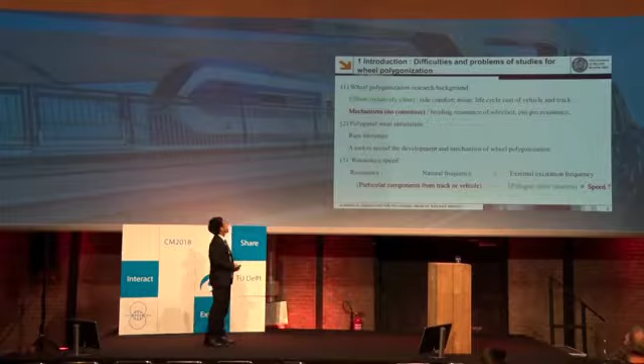In the first part, I will introduce my reflection about the difficulties and problems in studies of wheel polygonization. It has been studied for over 30 years. The effects are relatively clear, but the mechanisms are still unknown. Some research shows the mechanism is concerned with bending resonance of the wheelset, pin-pin resonance, and other possible reasons. But by far, there's no consensus.

From my viewpoint, one of the difficulties in studying this problem is that it is not easy to simulate the polygonal wear process. But once we achieve this, we can figure out each step from the initial out-of-round profile to the final worn, possibly high-order profile. This is a very important tool to reveal the mechanism of wheel polygonization.

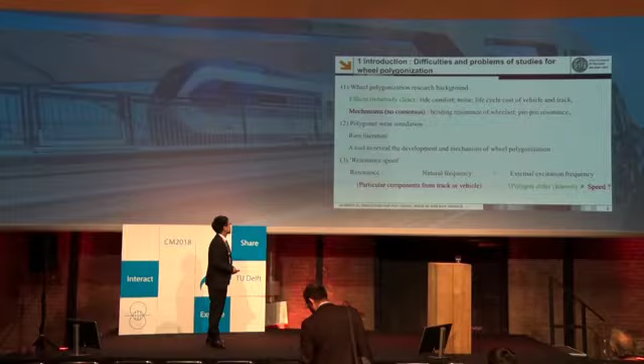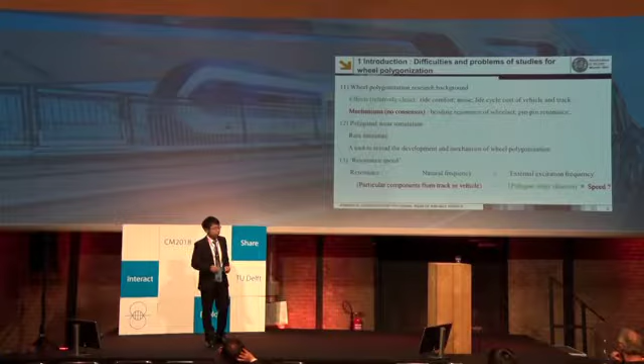Another problem I want to mention is about resonance speed. Usually the generic logic to study wheel polygonization is to find a resonance frequency from the vehicle system or track system that equals the outside excitation frequency caused by polygonal wear at a specific speed. But the problem is, which speed should we use, the maximum speed or the average speed? This could be more difficult to answer for a metro vehicle, because it changes speed for more than half of the running time. In my research, we give some ideas to these problems.

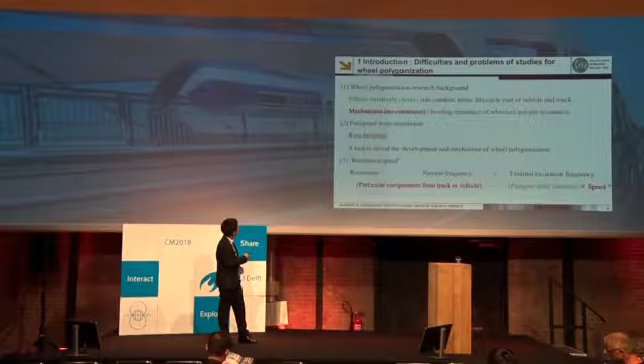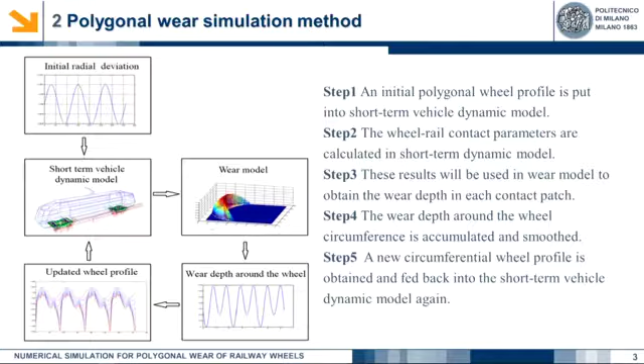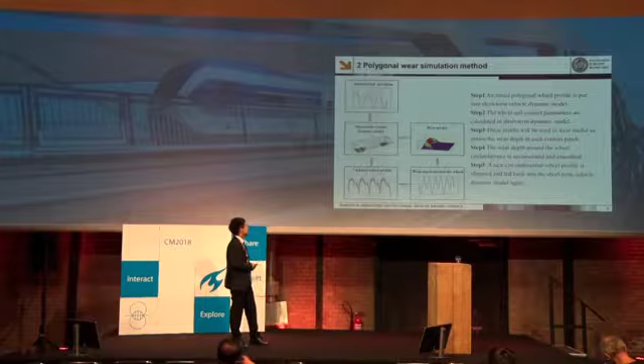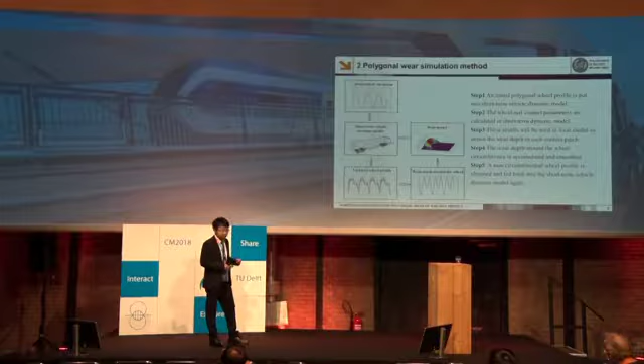Now let's come to the second part, the simulation method for polygonal wear. Here is a schematic flowchart of this method. First, an initial polygonal wheel profile is put into a short-term dynamic model, and some wheel-rail contact parameters like normal force and contact positions are obtained. This data is used to calculate the wear depth for each contact patch using wear models. Then the wear depth around the wheel circumference is accumulated and filtered, and based on this we get a new circumferential wheel profile, which is sent back into the short-term dynamic model. After iteration, we can finally get the development process of the polygonal wear.

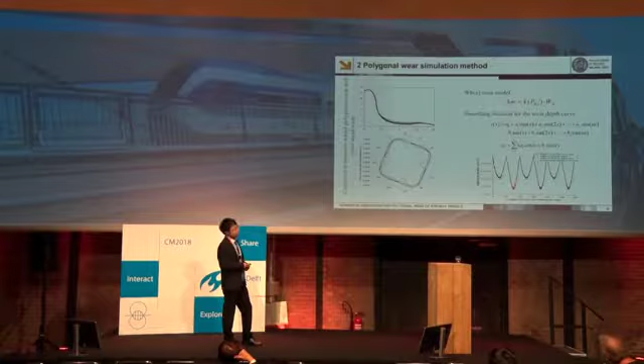Here I present some detailed problems inside this simulation method. The wear model I use is based on wear friction power, which assumes that the removed material is proportional to the wear friction power.

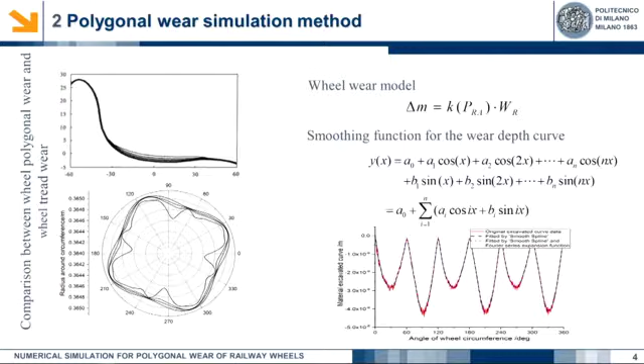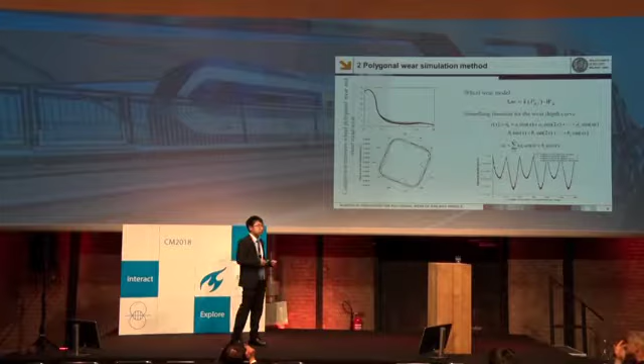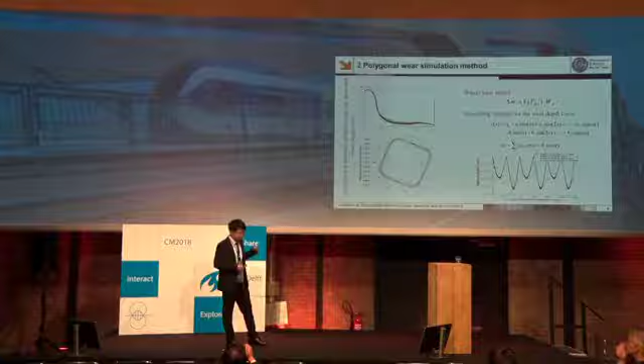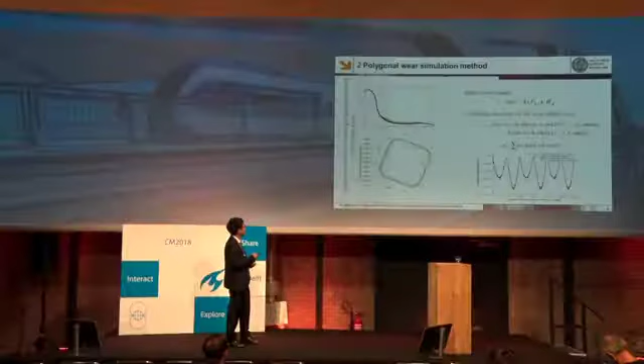There is a new challenging issue when you simulate polygonal wear. The wheel circumference profile is a closed line compared with the wheel tread, meaning the point at 0 degrees and the point at 360 degrees are connected to each other. So some conventional curve fitting methods cannot be used because they cannot ensure the connecting point is continuous and differentiable. Simulation results show that even a small disturbance at the connecting points brings about a huge impact. So to solve this problem, we propose using a Fourier series expansion function to fit and smooth the curves. You can find more detailed explanation in my paper.

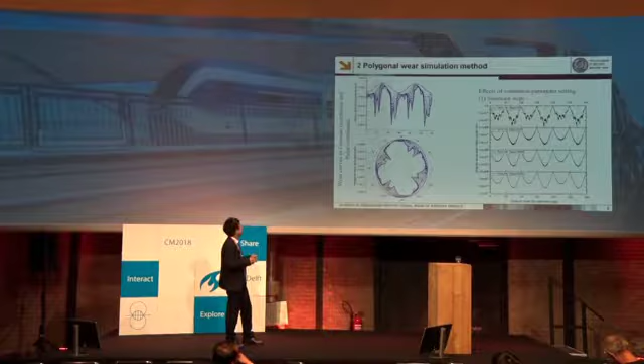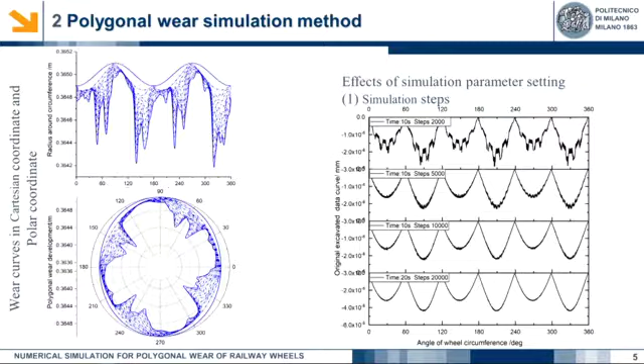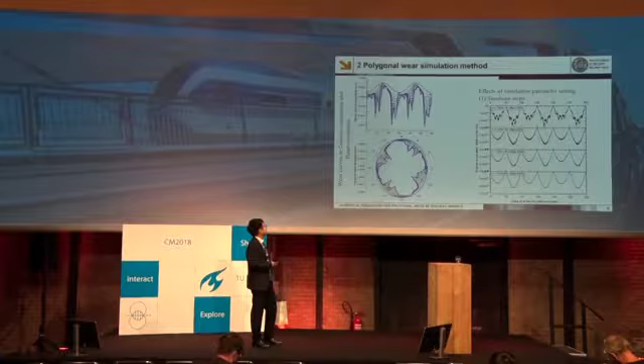Here I present examples about the wear development of an elliptic wheel, the second order of wheel polygon, in different coordinations. You can observe the increase of polygon depth and changes in polygon order. But this is not the end of the study for the simulation method, because I find there are other factors that can significantly affect the simulation results. I'll select one to present, and that is the wheel profile updating condition.

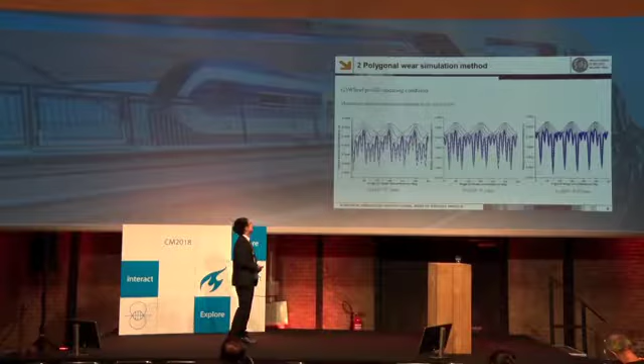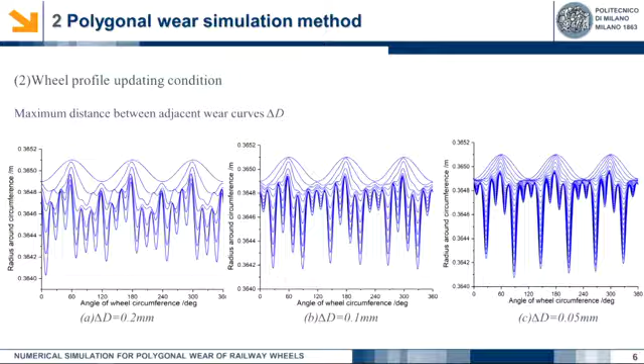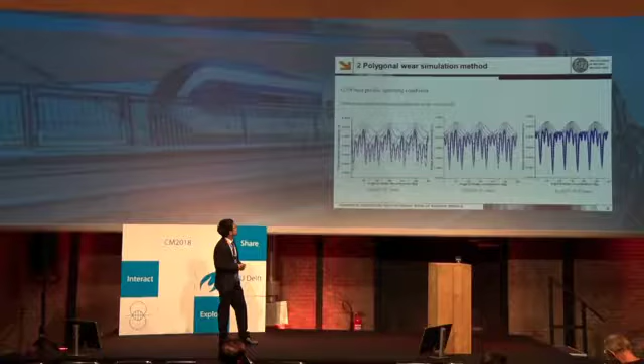The ΔD here is the maximum distance between adjacent wear curves. Theoretically, the ΔD should be selected as small as possible, because a simulation with too large a ΔD is quite different from the real wear process. But too small a ΔD means a large number of iterations. In this case, some small simulation error, for example an error coming from the curve fitting method in the upper stage, will be accumulated and magnified if a large number of iterations is applied. So too small a ΔD should also be avoided. You can find more descriptions about these studies in my paper.

Now let's come to an interesting part, a case study for a metro vehicle. This metro vehicle is featured with linear motor traction technology. An initial fourth-order polygonal wear was found after wheel reprofiling, and it grows into 8th and 9th order polygonal wear.

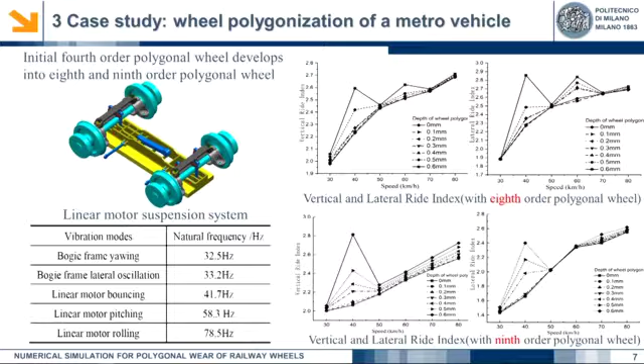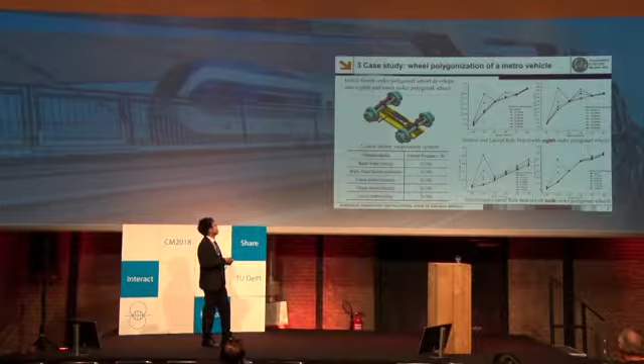We were told by the staff of the metro company that the ride comfort of this metro vehicle is not so good. So at first, we did simulation to calculate the ride indexes at different speed levels with 8th and 9th order polygonal wear. We found that when the vehicle speed is around 40 kilometers per hour, the ride indexes become extremely severe.

After analysis, we realized this is probably because when the vehicle is close to 40 kilometers per hour, the outside excitation frequency caused by polygonal wear is around 40 hertz, which is quite close to the natural frequency of the bouncing motion of the linear motor. In this case, the resonance of the linear motor will be triggered, and the vibration will be transferred to the car body, which results in bad ride index.

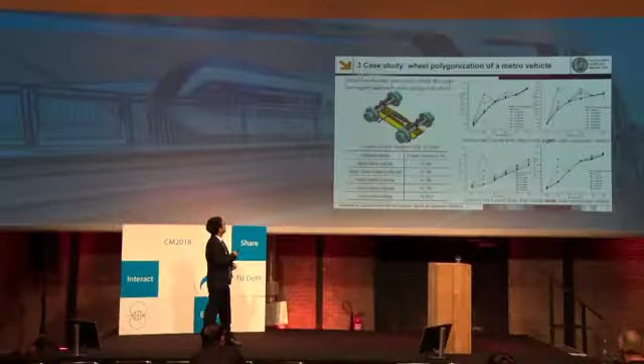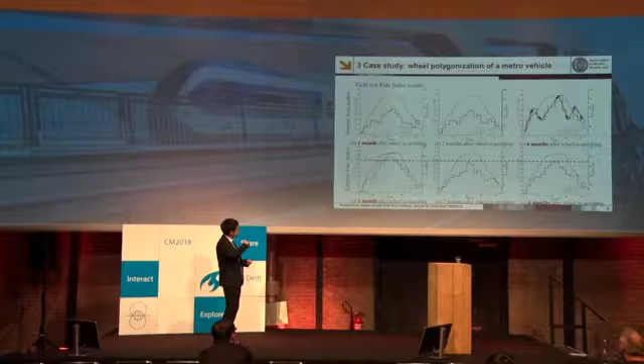After that, we did some long-term on-track tests at 1 month, 2 months, and 6 months after wheel reprofiling. Here I present some typical measured data on a straight track zone between two stations. The continuous lines are time history of speed, and because this vehicle runs in ATO mode, the speed line is the same each time, and the stepped line here is the ride indexes.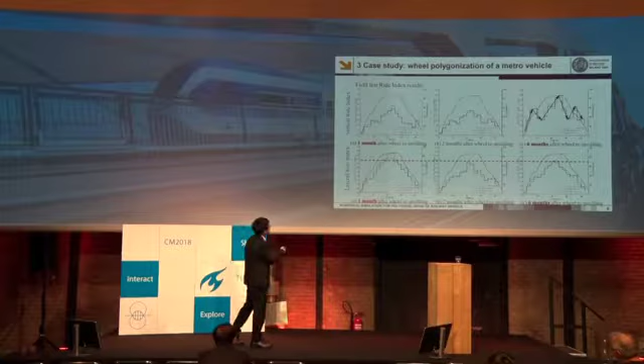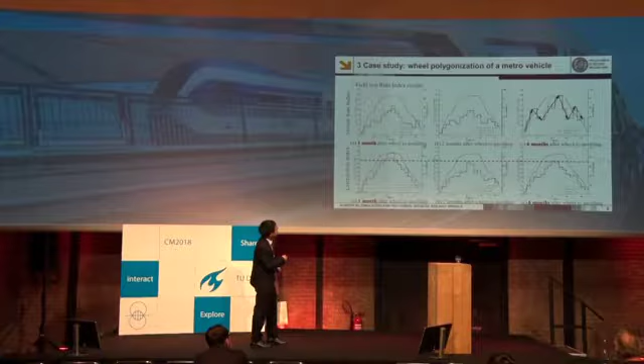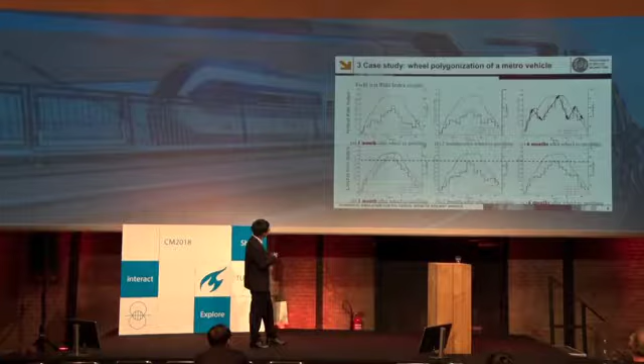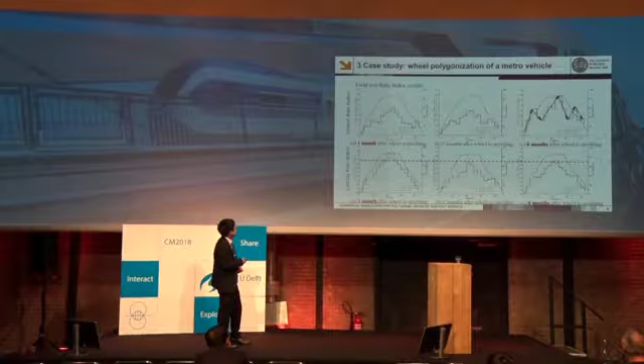You can easily find some features: a few months after wheel reprofiling, the vertical ride indexes become worse, especially at the speed around 40 kilometers per hour. This result is consistent with our previous simulation result. For the lateral ride indexes, after wheel reprofiling, they are worse, but improve in the following months. This is a very strange phenomenon. But in general, we can see that the dynamic performance of the vehicle has different features in different stages.

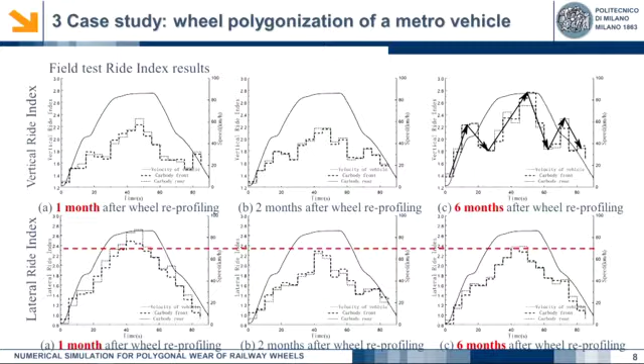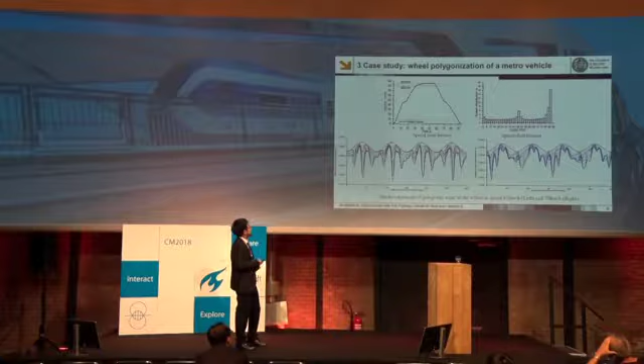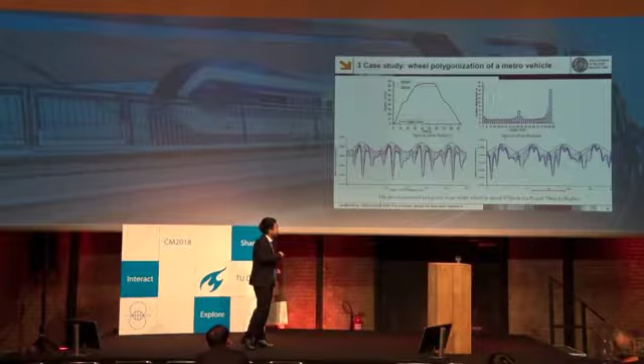We also realized that with initial fourth order, the vehicle will produce 40 hertz at around 85 kilometers per hour, which can trigger resonance of the linear motor. We also got the distribution of speed level according to measured velocity data, and you can see that the most frequent speed level is around 85 kilometers per hour. So the polygonal wear at 85 kilometers per hour with an initial fourth order will be very important.

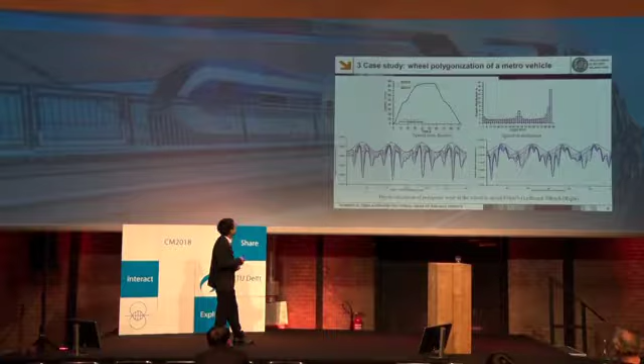We did the simulation in this case, and here you can find the simulation result. I divided this process into two phases. In the first phase, the initial fourth order quickly develops into eighth order polygonal wear. In the second phase, the order does not change apparently, but the depth starts increasing.

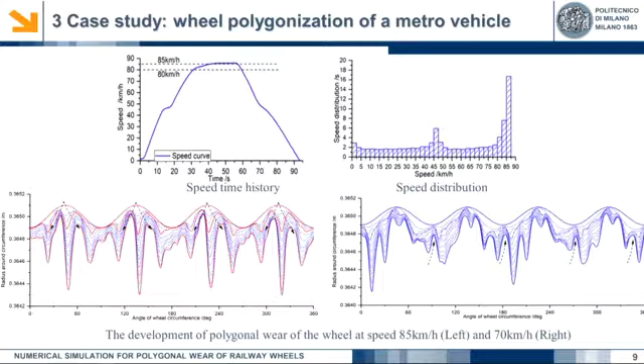We also did simulation at some other speeds. Here you can find the wear at 70 kilometers per hour. You can find the shape is quite different, and more importantly, the wear speed is relatively extremely smaller than the wear at 85 kilometers per hour.

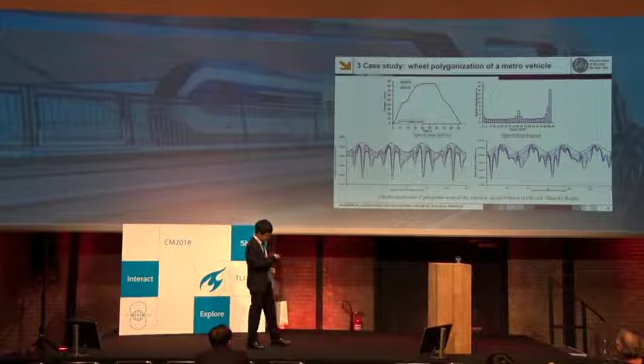Based on this study, we propose an explanation for the wear polygonization of this metro vehicle. In the first phase, with initial fourth order polygonal irregularity, the wheel will produce 40 Hz excitation, triggering resonance of the linear motor. The vibration of the linear motor is transferred to the carbody and also to the wheelset. In this stage, the polygonal wear develops from initial fourth order into eighth and ninth order.

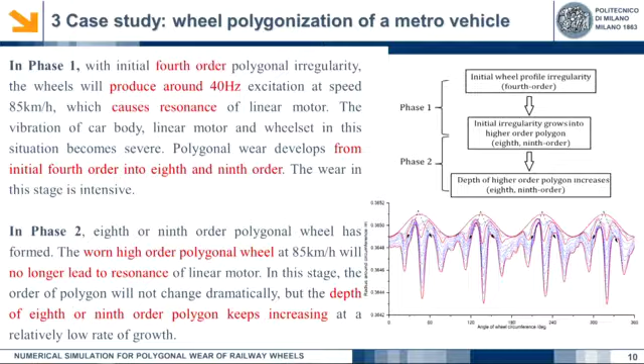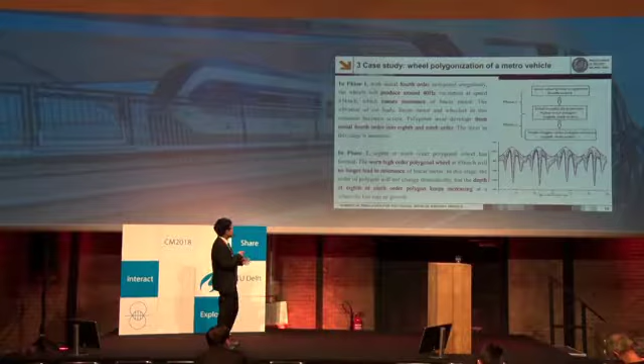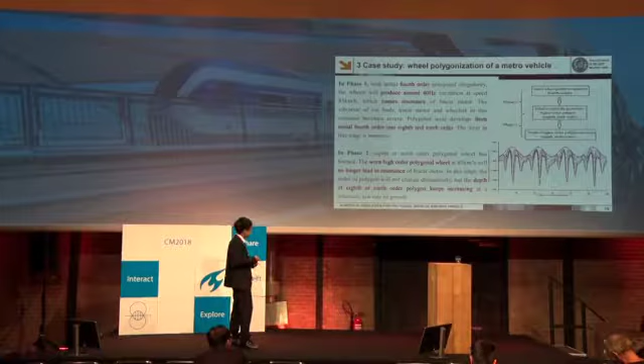In phase 2, when eighth and ninth order polygonal wear has formed, the high order polygonal wear will no longer, at 85 kilometers per hour, lead to resonance of the linear motor. But when the vehicle velocity comes to 40 kilometers per hour, the resonance will happen again in a very short time. In this stage, the depth of high order polygonal wear keeps increasing at a relatively low speed.

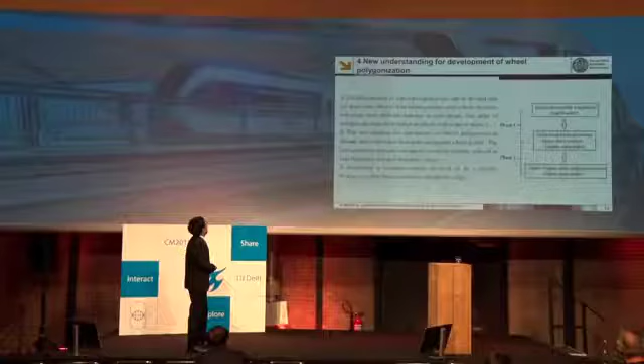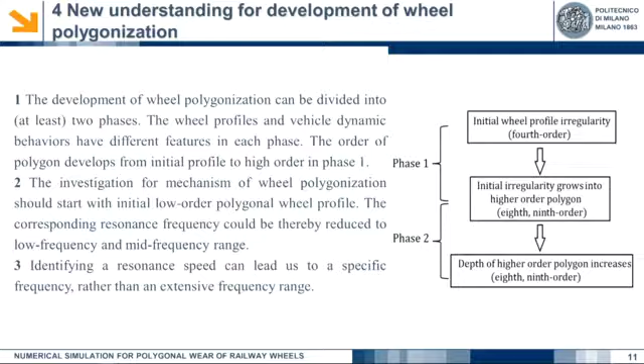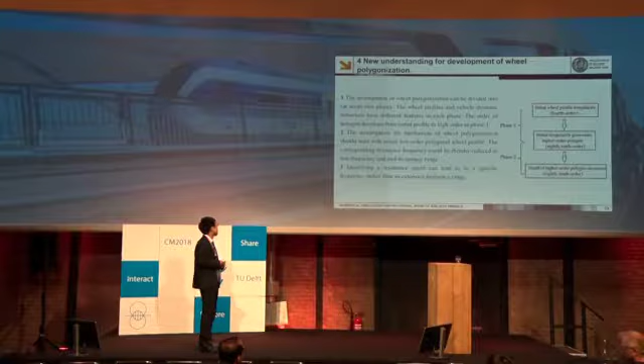Based on this case study, we propose some new understanding for the development of wheel polygonization. Firstly, the development process of wheel polygonization could be divided into different stages, and the wheel profiles and vehicle dynamic behaviors have different features in different stages. Secondly, the investigation for the mechanism of wheel polygonization could start with initial low order instead of high order. If you do this, you can find the corresponding resonance frequency you are looking for will be reduced to a relatively low frequency. Thirdly, we find that identifying a specific resonance speed will lead us to a specific frequency rather than an extensive frequency range.

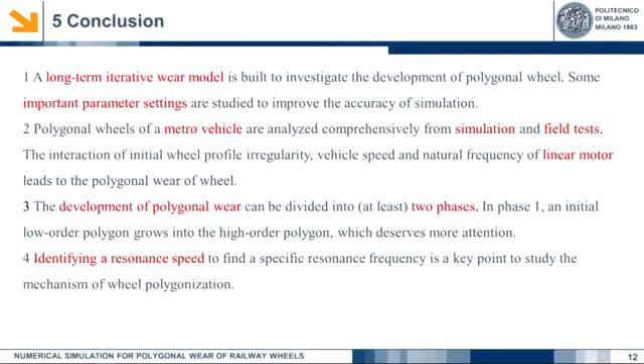Now let's come to the conclusion. Let's review what we did in this research. Firstly, we established a long-term iterative wear model, and we studied some important parameter settings to try to improve the accuracy of simulation. Secondly, we tried to analyze wheel polygonization of a metro vehicle. Thirdly, we find the development of polygonal wear can be divided into different phases. Finally, we realized that identifying a resonance speed is an important point to study the formation mechanism of wheel polygonization. Okay, thank you, everyone.

Thank you. Thank you.